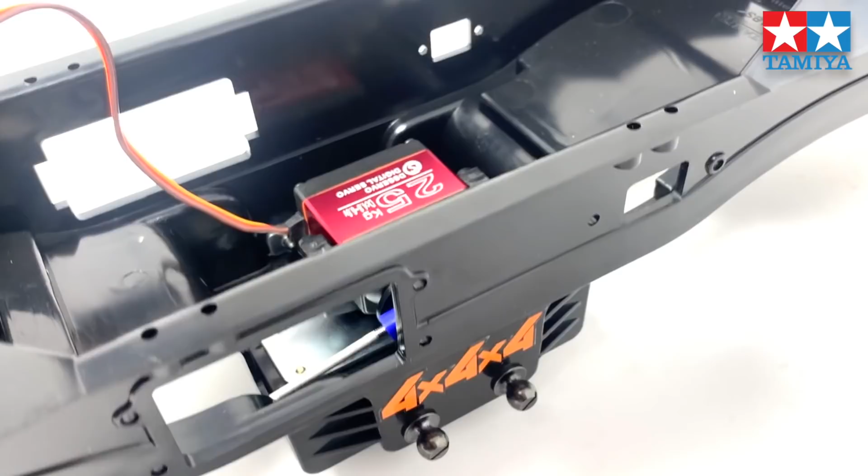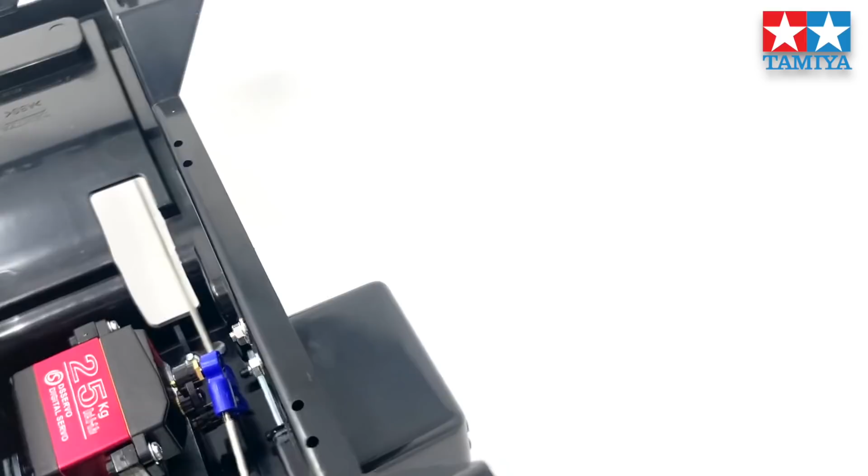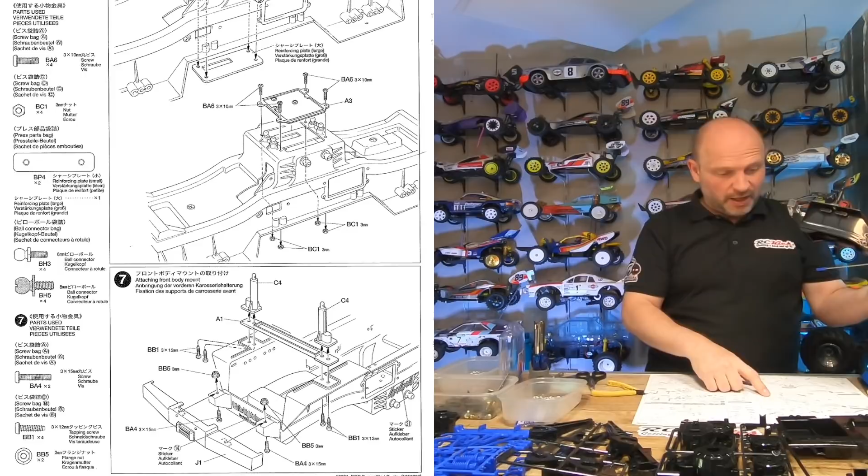I've just finished page 6, number 7. I put the servo in. One thing that was very strange is it asks you to put stickers on right from the beginning. On page 6, number 5, it asks you to put this sticker on, the one at the front and the one at the back. I'm guessing later on access to these must be difficult, so I went with it and did what they told me to do.

One thing you'll definitely need to do is true up your servo before you fit it, because there's no way to adjust the servo horn once you fit it, not unless you drill a hole through there so you can get access. But I guess you wouldn't want to do that. You can just undo the 3 bolts and take it out. So I've hooked up all the electronics, trued up the central location for that servo, and carry on.

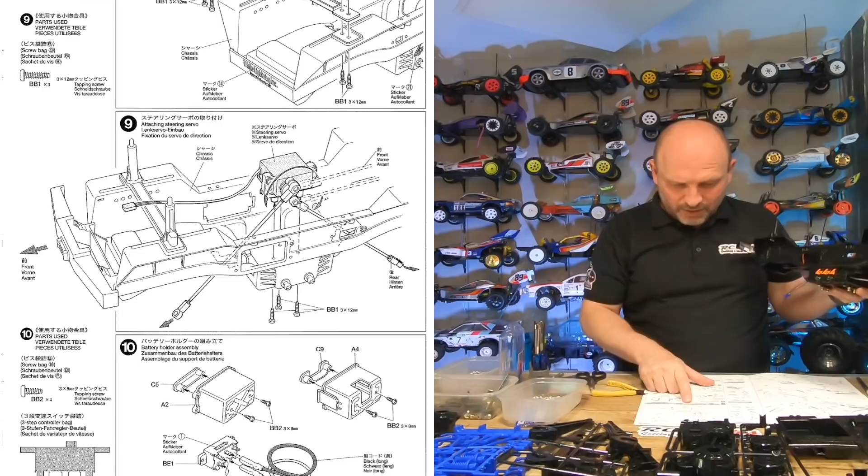So now from here we have to move on to page 7, which is number 10, which looks something to do with the battery pods by the look of it. No problems at all from that point of view. Very simple, just a big tub really. Right, let's carry on.

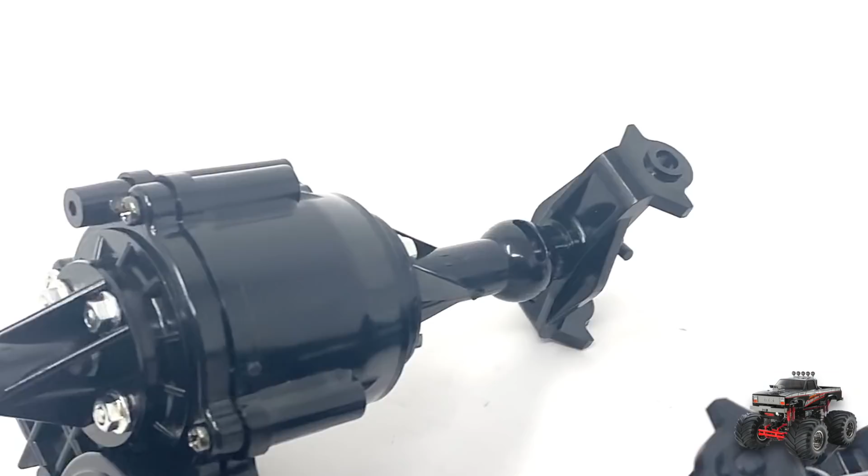So I've finished the 2 gearboxes, nothing special there, apart from if you noticed in the video that's just been played, I actually put the drive shafts in the wrong way round and they're held with big split pins. Fitting split pins is a bit of a pain in the backside, but what's worse, having to undo them to do them again. Yes, that's right. So no idea why I put them in the wrong way round.

It was very clear in the manual. It wasn't like, oh, I didn't really realise - I don't know whether I wasn't paying attention and I just put them in the wrong way around. So I had to go back and change all of them again. Apart from that, which was my own fault, nothing to do with the manual, so I wouldn't advise to watch out for that because I don't think anyone else is going to make the mistake. I guess I was too busy thinking about something else.

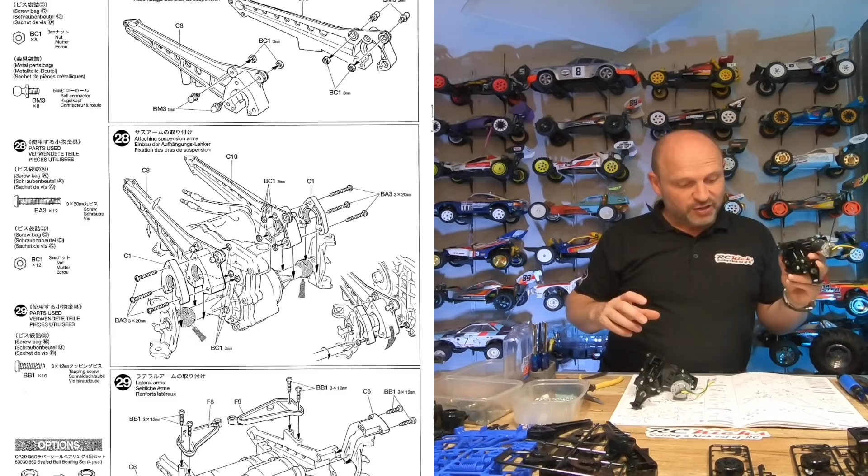What else did I have that was any problems? That was pretty much it. Okay, so next we got to move on to page 10, number 27. So we're now doing the arms from that point of view. Right, let's keep going.

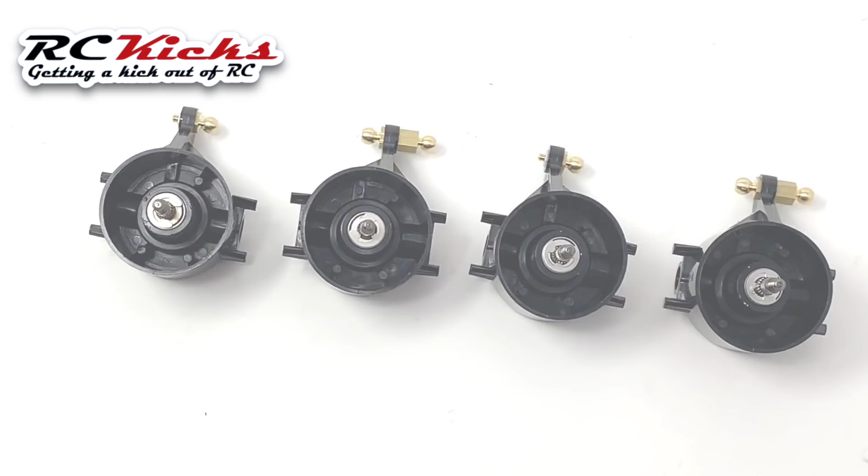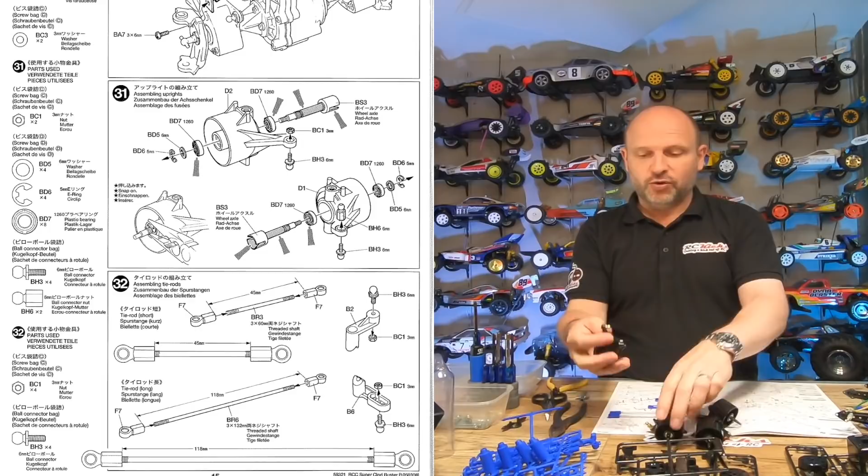Gearboxes are now completely finished. I've now done the hubs, the front and rear hubs. They are separate - there's two different versions of them. So you have two that are like this design, and then you have two that have an additional ball on the top. No issues with these.

You still got split pins, which are a bit of a pain, but not that much of an issue at all. Obviously you've got to fit bearings on both sides. There's quite a few bearings in this kit, so it's definitely worth recommending going to full metal bearings on these. Don't stick with the plastic ones, they're awful.

Right, I've just done the rods for the steering, which finishes page 11, number 32. So I've just got to do the little steering parts, which is BH3 and B2, and then we can move on to where it becomes more fun, where we're actually connecting up the steering. So let's carry on with that.

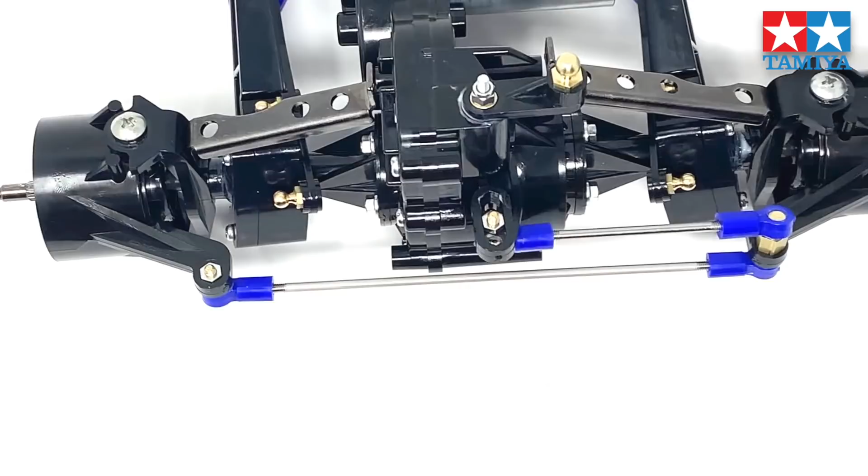Right, we finally finished the gearboxes. Both front and back are completely done. The steering's in, the bumpers are on, and that takes us to page 13, number 36.

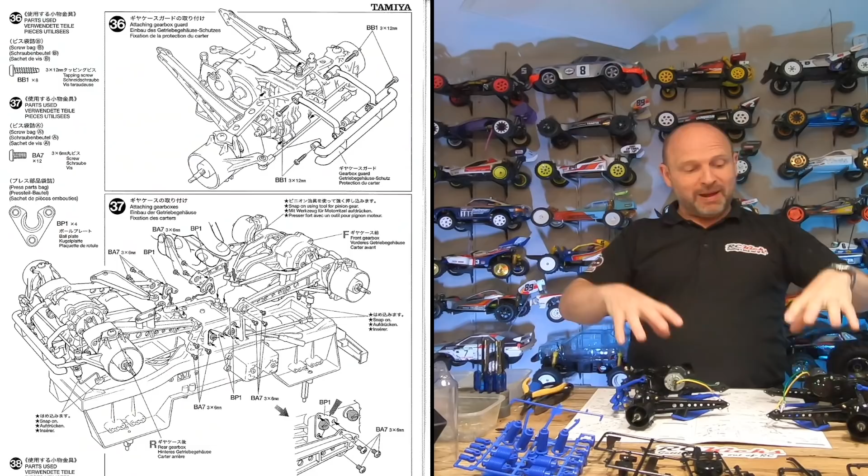Next, the fun bit. Finally, we get to mount these into the chassis. So far, the build's pretty straightforward, to be fair. The only negative is you're basically doing everything twice. These are identical apart from the steering arms pointing in slightly different directions. Apart from that, there's no difference whatsoever. Let's get them in the chassis, then we're getting close to putting the wheels on and getting the suspension in, and it should be starting to look like a massive monster truck finally.

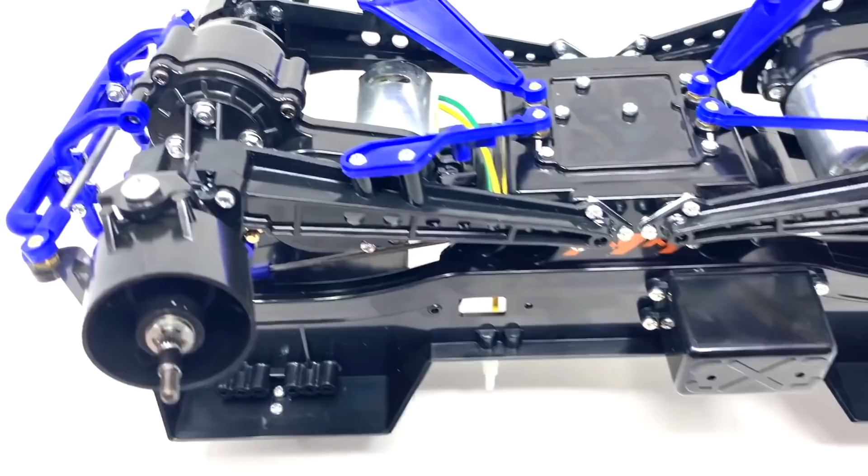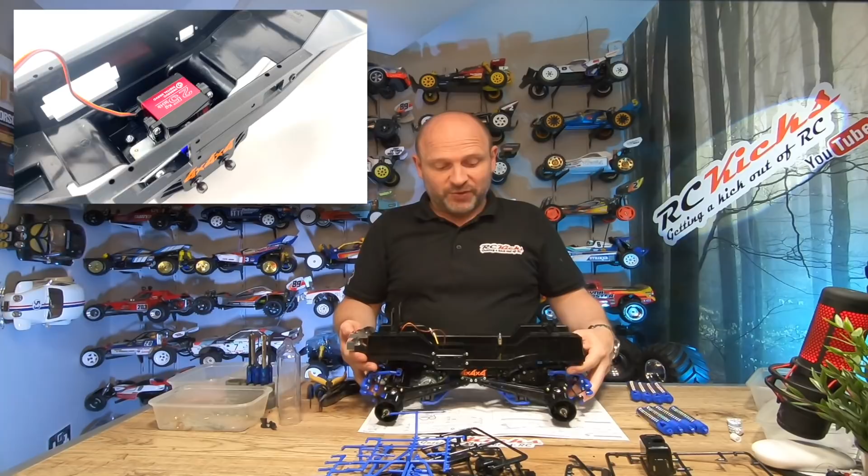So the chassis is taking shape, it's starting to look like a truck. I've now got the front and rear on and everything's connected up, all the steering's connected up. I didn't realise there was only a single servo in the middle driving both sides. So I can see that's going to put a lot of strain on this car, one servo trying to move that many wheels. So I'm definitely going to do an upgrade where it's a servo on each axle. That will definitely come in the future.

I can see quite a lot of potential upgrade possibilities for this truck, which is really interesting because I'm going to take this one as far as I can. We're really going to push the boat out. We're going to do some smaller upgrades, and then eventually change the whole chassis to maybe metal or carbon or something funky like that. So yeah, we're really going to see what this is capable of.

Right, I've done all the suspension off camera because it's dry suspension and it's boring as hell, and obviously there's twice as many of them. It doesn't take very long. One thing I found very strange is the rubber section it asks you to put in. It gives you a size, and it means you don't have much travel. There's only that much, even though the suspension is very long.

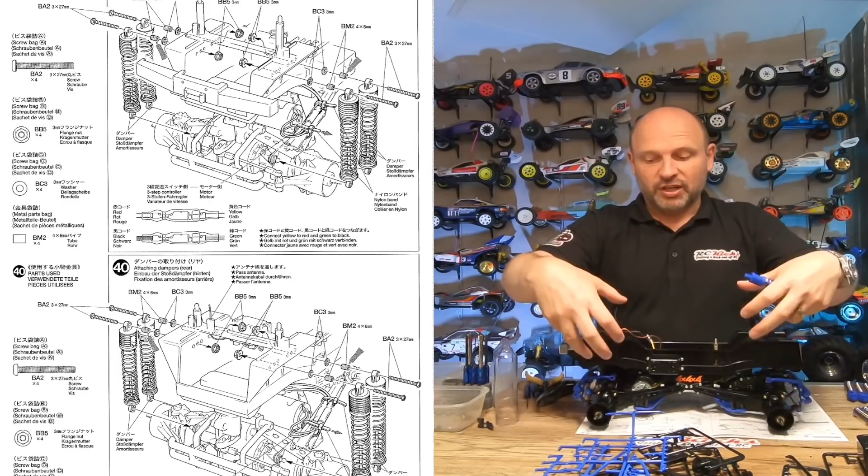So I'm not sure whether I can cut this down to add more suspension. I'll see what the clearance is like. I'm guessing that's why it's like that, because of the clearance for the wheels when they're turning - if you go shorter, it will depress further and then collide with the body. Next I've got to connect these up, and then we're getting very close to putting the electronics in.

Well, that's the chassis build finished. And what did I think? Pretty straightforward - there's nothing super complicated in any of that, and it's quite fun. Once you start bolting the wheels on, you realise how crazy this truck is. Basically, it's like a driving bathtub. This is the best way to look at this chassis.

Putting the electronics in, plenty of room, super easy, nothing difficult whatsoever on that front. You're not exactly fighting for space inside this massive, great big chassis. Now, it's all fully working. We'll fire it up - I've trimmed it up and I've actually taken it for a test drive, which is why you can tell by the tyres. So it's all working.

So next we're going to take it out for an early experimental run. Let's go out the studio now and blast it around the garden for a bit, and then we'll be right back.